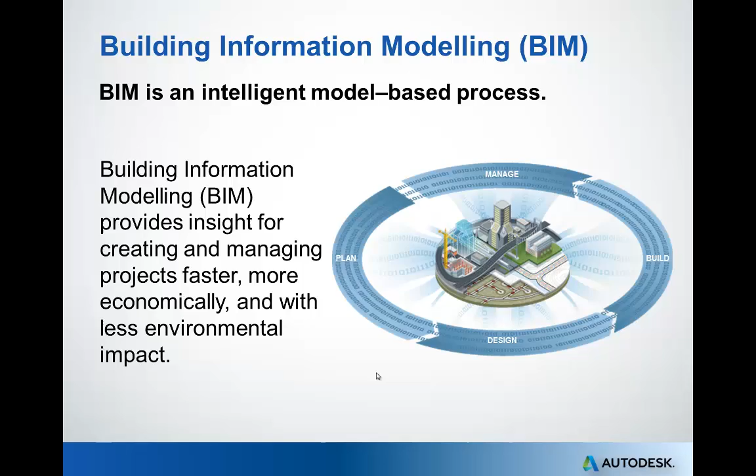If we look at architects, they've consistently been the heaviest BIM users, due to the length of time they've been involved with building information modeling. They're projected to reach an industry-topping level of 75% adoption by the end of 2014.

Engineers actually had the lowest level in 2011, at 26%. This is expected to almost double, going to 40% by the year 2014.

And it's interesting, the fastest rate of growth right now is with contractors. They're projected to reach over a 50% adoption level by the end of this year.

As Douglas and I have talked internally here at EDSI, this is consistent with what we're seeing in our region. Higher education and universities have been the largest driver, with Virginia Tech, UVA, Liberty, VMI, and Radford University all having multiple projects requiring BIM deliverables.

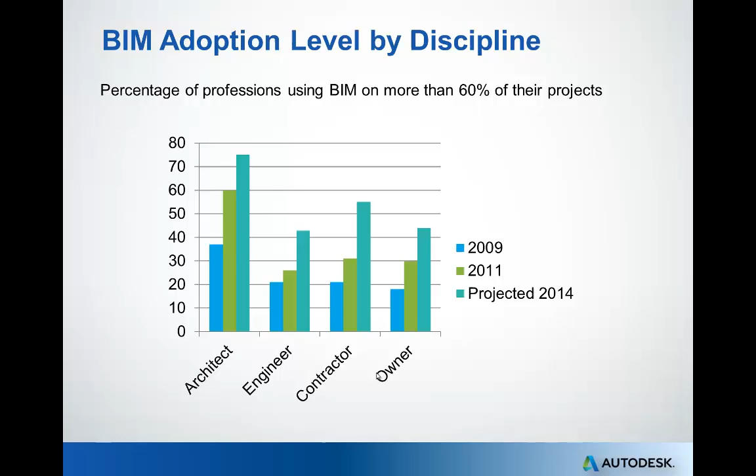Every organization is different. We all have different projects, different processes, and different skill sets within our organizations. We feel that the key to any investment you make is ultimately to achieve a return on your investment, or an ROI.

As we talk about return on investment, it's important to realize that the business value of BIM is driven both by internal and external forces, and at multiple levels.

Let's consider the areas where one might find the value of BIM from multiple perspectives. At the very center, the value of BIM can be realized at the project level. This is where, by its basic nature, BIM drives improved design quality, reduces project delivery cost, and can also reduce the timelines associated with RFIs and change orders.

This is where the use of BIM can have an impact to make a project finish under budget and ahead of schedule. The project-level benefits of BIM are amplified as we look at the overall value to a firm that's implemented BIM.

Firms can see the value of BIM in increased profits resulting from multiple factors. These include the ability to offer an expanded range of services that can help you reach new market segments. The use of BIM can also help firms maintain repeat business with existing clients. And the predictability that working in BIM affords a firm can also result in fewer legal claims associated with litigation fees.

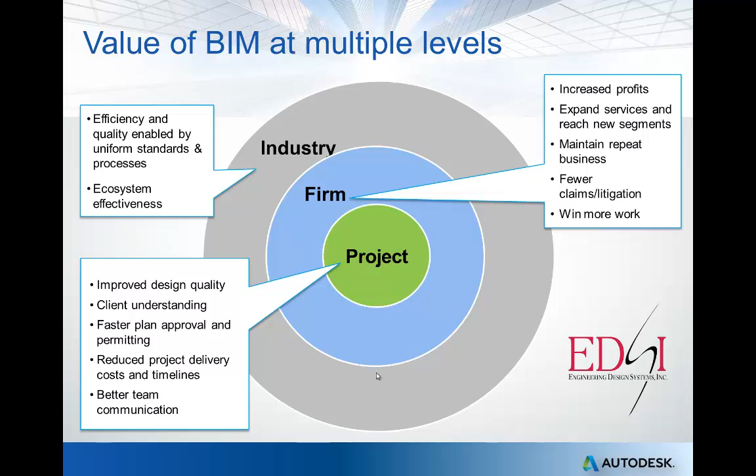Last but not least, we're seeing the value of BIM from an industry perspective. Overall, we gain efficiency in sharing and coordinating more information through an intelligent model.

Now, we've talked about the benefits, but the transition to BIM is not without cost. Firms need to make investments in software, subscriptions, investments in their people, and in their computer systems. It's also important to look at implementation costs, training costs, and costs of developing a template. Last but not least, BIM requires a process change within your organization, so we need to start rethinking team roles and looking at new, more efficient communication models.

With all this being said, the benefits and the payback can be significant. The firms that have successfully implemented BIM have increased productivity, increased collaboration, fewer change orders, more accurate estimating, and overall better designs.

Now, we found at EDSI the key to getting a real return on your investment is a good, solid implementation within your organization. We just like to say this is not your typical software upgrade. To be successful with this technology, you're going to need a comprehensive plan and a high-level approach.

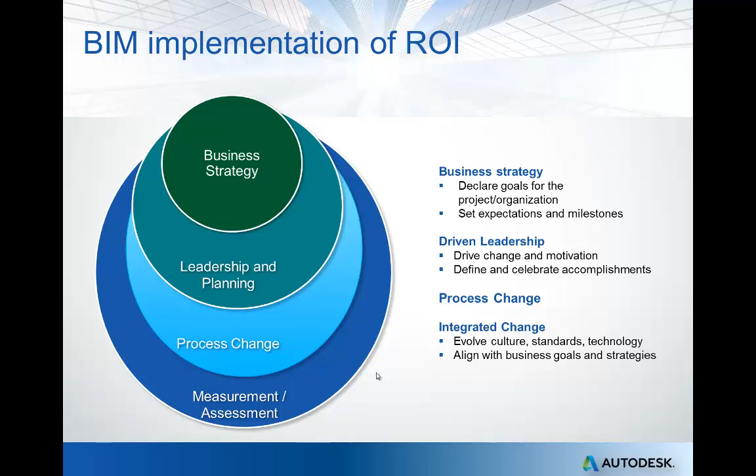The bottom line, I think, is our organizations have built our processes and workflows around our legacy software tools and technologies. With Revit and BIM, it's really necessary to look at how we work and how we share information to ensure we get the most from this powerful technology.

Now, Revit is Autodesk's solution for BIM. It was purpose-built for building information modeling. And with that, I'd like to introduce you to Douglas Bray. Douglas is an AEC and BIM specialist here in Engineering Design Systems. He has assisted numerous firms with extremely successful BIM implementations.

As I introduce Douglas, I'd just like to say that Revit is a better tool for design and documentation. Douglas is going to give us a brief demonstration on 3 topics where this application really excels.

First and foremost is the automation of processes. Douglas is going to demonstrate how Revit handles so much of the tedious drafting and documentation automatically. Second, he's going to show the power of drawing coordination with the Revit platform. Coordination and sharing of data has always been a challenge in our industry, and Revit provides a great platform to better coordinate disciplines. Last but not least, this is a tremendous tool to help you visualize and sell your designs.

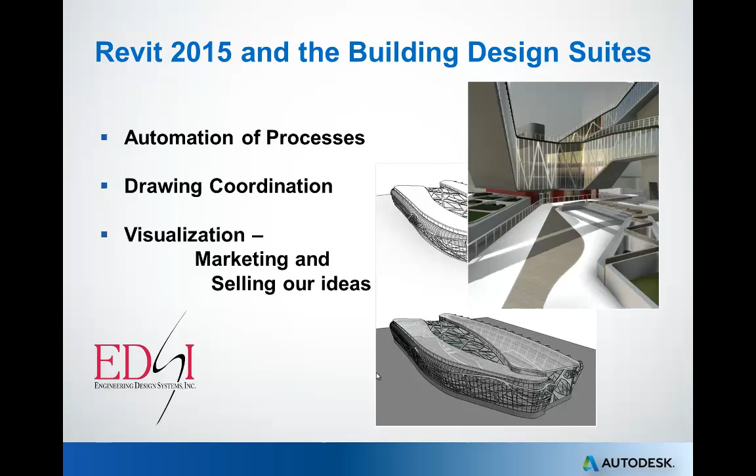Today we're going to look at Autodesk Revit 2014. The three areas I want to focus on are the automated process, the coordination, and the visualization.

Most projects, when you as an architect get started, you may have some type of a layout from the coordination that you have with the owner on what you would like to do. You have your exterior shell, and then you have the interior. In this example, I want to focus on the design options aspect of Revit 2014. Here we just have a basic layout where we have an open office, office A, B, and a restroom for the men and women and a mechanical room.

As architects, you like to present the owner with different layouts, or even for yourself. So within design options, we have the main exterior area, which will be for the main model. If I click here on this view, we can have option 2. Now within this option, I'm going to make this option editable. Notice that the main model grays out.

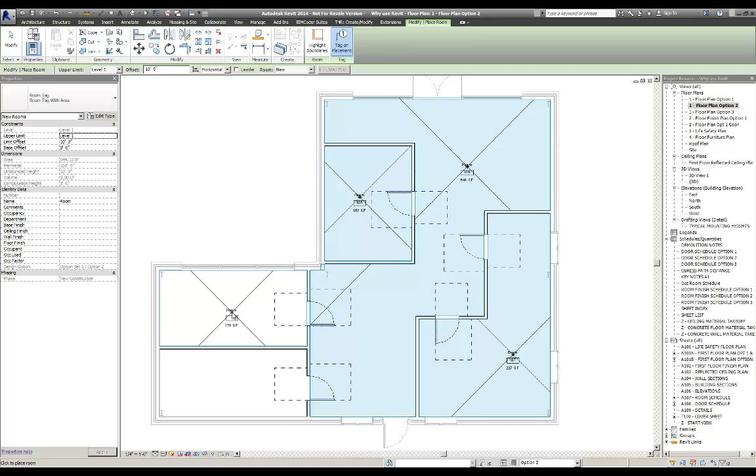This is just for a general layout to illustrate how this is going to be. So let's go ahead and add in our rooms for these areas as well, here, here, and here. This is going to be our layout that we're going to present for ourselves as well as for the owner. It's sort of like the tissue paper that architects use when it comes to different layouts. So we can go to layout 3.

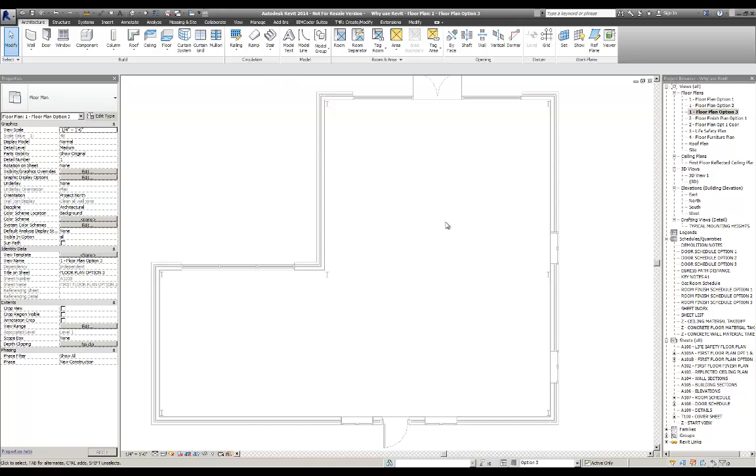Floor plan option 3. We're going to make that one editable, and we can do another one. So maybe we do something a lot more simpler, something like that. Come straight down here, and we'll come straight over here.

Let's add in our doors, interior, and you can have ADA doors here with the clearance on them. Okay, and now let's add our rooms in here.

As we look back here, we'll go ahead and put this back to main model. We have option 1, which we're showing this particular layout. We have option 2, and we have option 3.

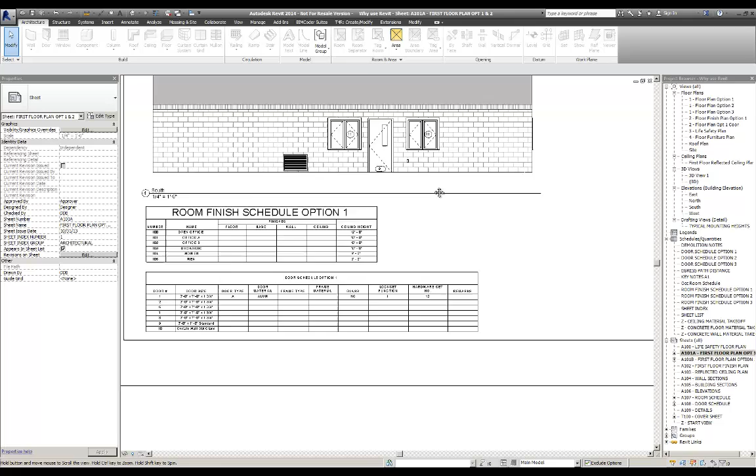Now what's really nice about this, if we look at our floor plan here, our sheet, each option as indicated here in the floor plan, of course we have some elevations of the exterior, but we can have our schedules that will represent each of those options. As you see here, room finish schedule option 1, and it shows all of our rooms that we've indicated for that particular option, as well as a door schedule.

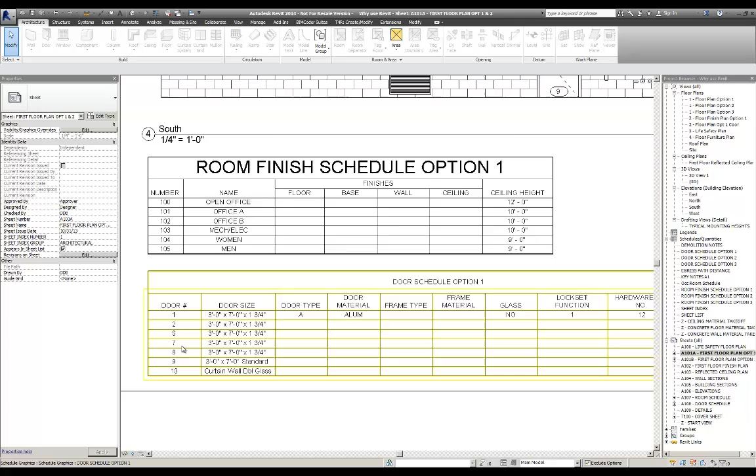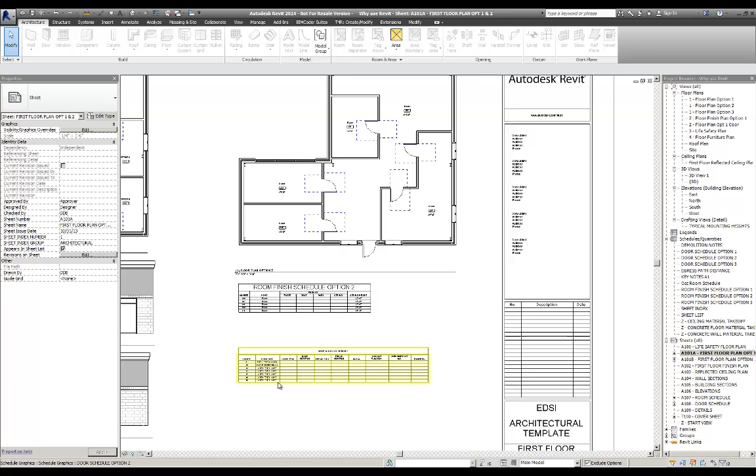If we go over here to option 2, we see that we didn't identify what these rooms are, but you can clearly see that it's identifying all of the rooms that were added for that option and that option only, as well as the doors that we added for that one as well. Okay, I think that's very, very powerful.

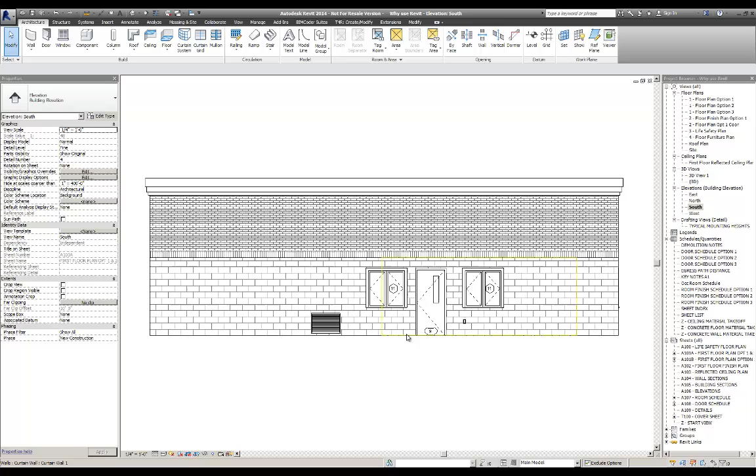Let's keep going. As we see here, we notice that within Revit, when you have a model, let's go back to our option 1. This is the main model. And the south elevation view is looking at it from the rear. So there's our rear door, and there's a window here and a window here.

Okay, so go back to this option. Let me close all the windows and open the south elevation view back open again. I'm going to tile it. So now we're capable of seeing the floor plan itself as well as the elevation of it.

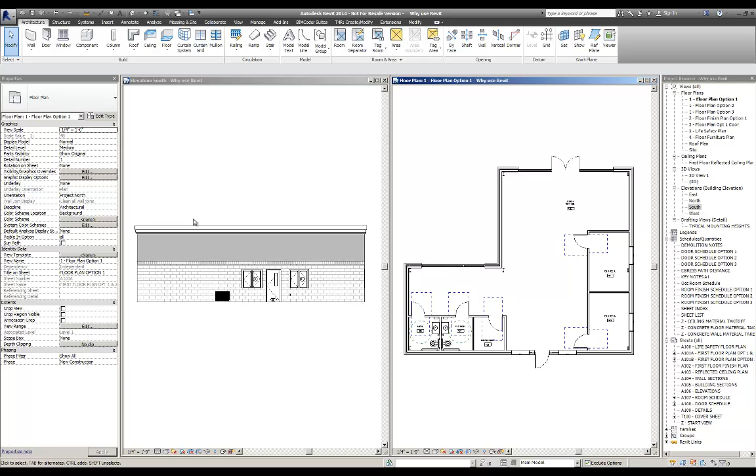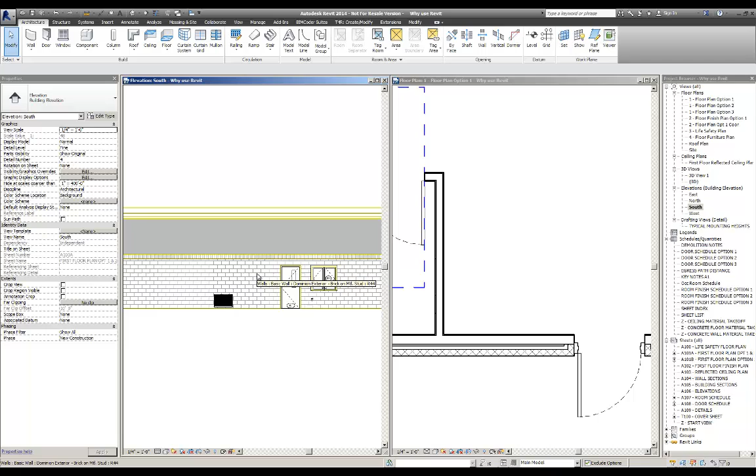Well, let's say that there is a change that needs to be made. So if this window here will need to be deleted, notice that not only did it remove it from off of the floor plan, but it also removed it from the elevation. So that's one less step you have to be concerned with when it comes to the coordination of whether the elevations are going to update with the changes that I make.

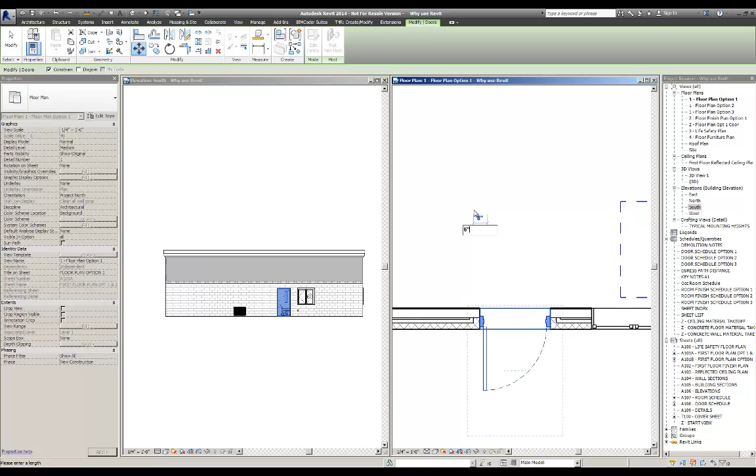Again, another example would be, let's say this door moves. Let's say we just move this door over 6 inches. And if you also notice here that the elevation, it moved over 6 inches as well. Even a door swing, if you take this door and we switch the swing on it, the elevation also updates as well. Very, very powerful. Let's keep going.

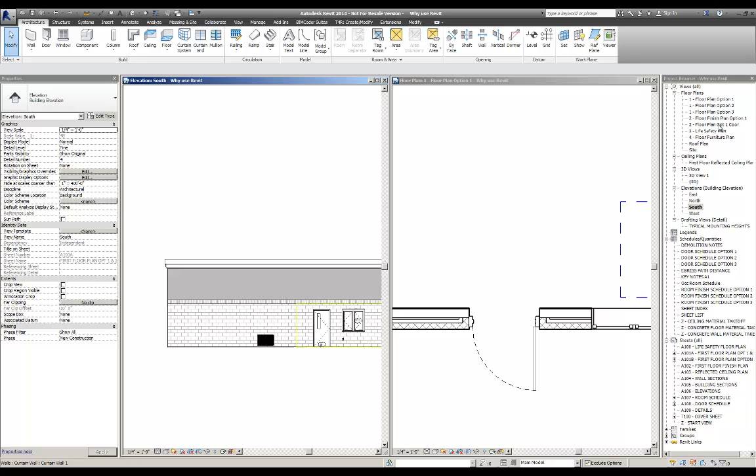So as we see here, we have some other views that we can look at. Right here we have a furniture layout plan. With the furniture layout plan, we can lay out our different furnitures. In our option 1 plan, we can also create it for option 2 and 3.

But what I really want to show you is the floor finish plan. If you have a view and you want to indicate what floor finishes will be presented, this is how we can do that. Again, we're talking about the automated process, so we quickly want to be able to show what floor finishes are going to be available. So let's make option 1 available.

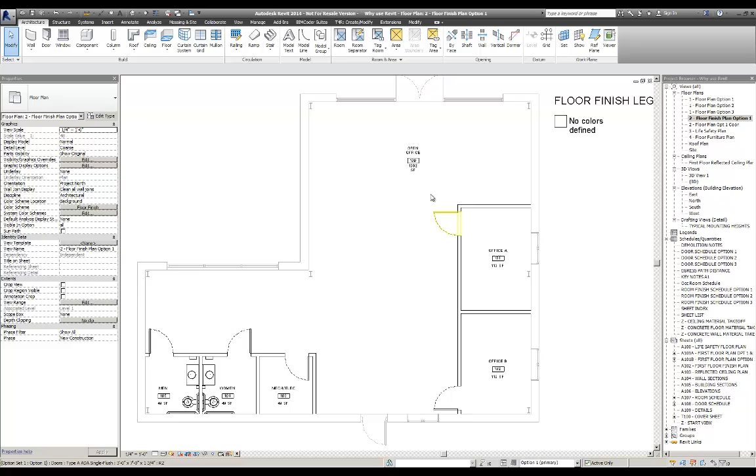We go here to this open office. Let's say we want the floor finish to be wood. We can come down here and pick wood. Not only will it show a pattern, but within our legend it shows us that within a box in here.

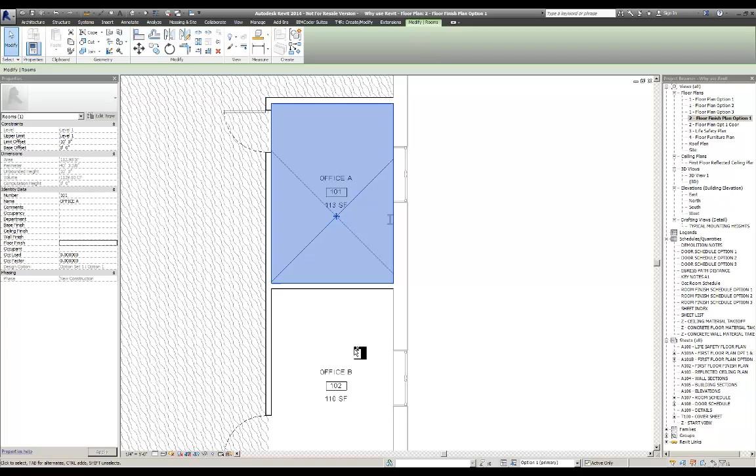Let's keep going. Let's say for this office as well as this one over here, we want the floor finish to be carpet. It adds that to the legend. And let's go over here. Let's say the women's and the men's bathroom, we want that to be VCT.

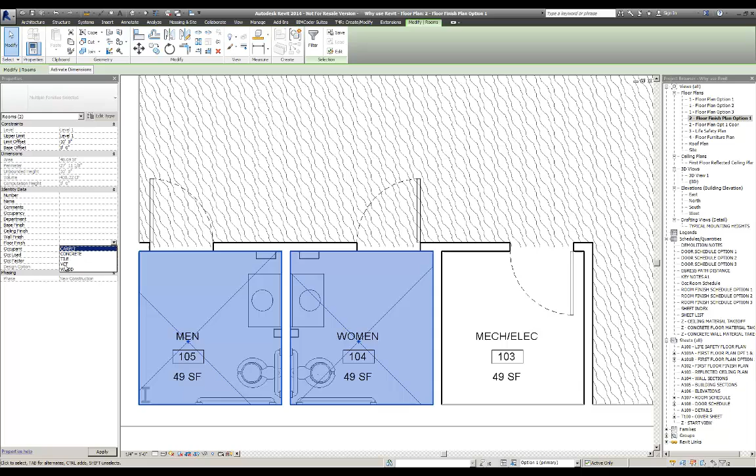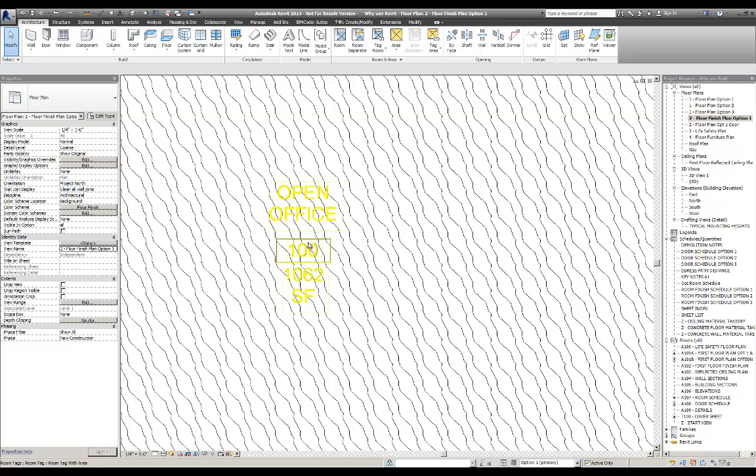And last but not least, we'll say that the mechanical room will be concrete. Now that's pretty fast. We're identifying the floor finishes, and as we see here, we have a square foot area with our tags that allows us to use this number to do budgetary calculations on how much it would cost for wood or carpet to be placed here. There's so much more we can do with this.

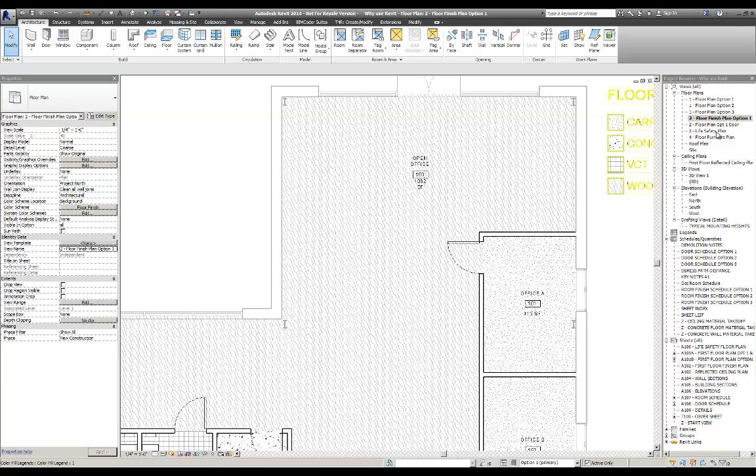Okay, let's look at our life safety plan. So we go to that view, and there we have a life safety plan. I know architects like to generate an occupant load. They want to know what the occupant load is for these office areas. So how can you do that?

Well, within the software you can generate a schedule that will pull in the name, the number, and the area. And we can put in an occupant factor. For an office area, depending on the local code requirements, I think this is going to be 100 for the office area, and that may vary from state to state.

So as we see here, there's a calculated formula going on where we're taking the area and dividing it by this factor. So for the open office area, the calculated occupant load is 11. And for those small offices, the code occupant load is 1. So we can put these numbers in to match up over here.

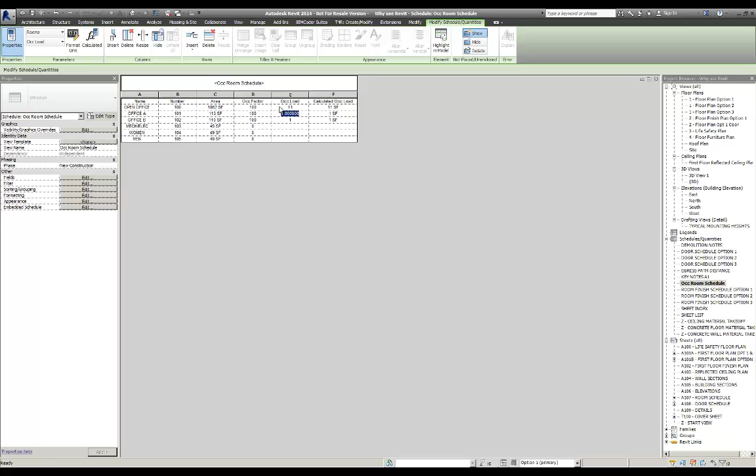And now we can go back to our floor plan and we see that our tag updates and shows us all the pertinent information that we need from that aspect.

What about a fire egress path? We have that capability as well. So we come over here to families. I believe I have that under special equipment. There we go. Okay, just want to put that in there, and then we're going to do create similar.

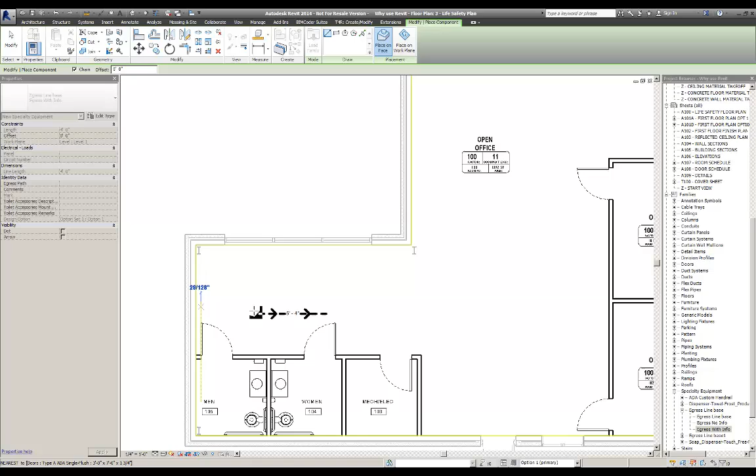And let's say we start. I'm going to start right here. Start an occupied space, we'll click here. I'm going to head on out here. Then I'm going to add one here and go straight on up. Take this one, we're going to delete it. Click right here, we're going to add us a dot to it. On this one, we're going to add an arrow. And on this one, we're going to add an arrow.

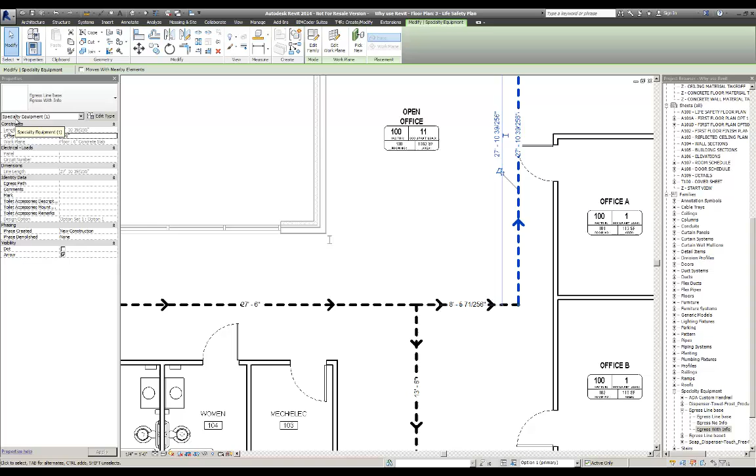Okay, let's do a little cleanup work here. Alright, and as you see here, this particular tool that I'm showing you, this is the specialty equipment category that I call it, but this is like an egress line-based path where we're showing the distance on it. So you know what's the distance needed from here to get out and all the way out this way as well. I think that is pretty powerful.

Let's keep going. What about from a coordination aspect? Okay, so once this floor plan has been approved, we can take this and hide that category. Once the floor plan has been approved, we want to submit this to our mechanical, electrical subs, so they will have time to lay out the mechanical, the electrical, and the plumbing.

Let's say we have done that, and now we're ready to review the type of work that they have done so far. Well, you can do that, and it would be very powerful if everyone is using the same platform. So this example is that your subs are using Revit 2014 as well. And as we see here from the project browser area, Revit link, I have an MEP .rvt file already linked in. So let's go to a view that is showing the coordination side.

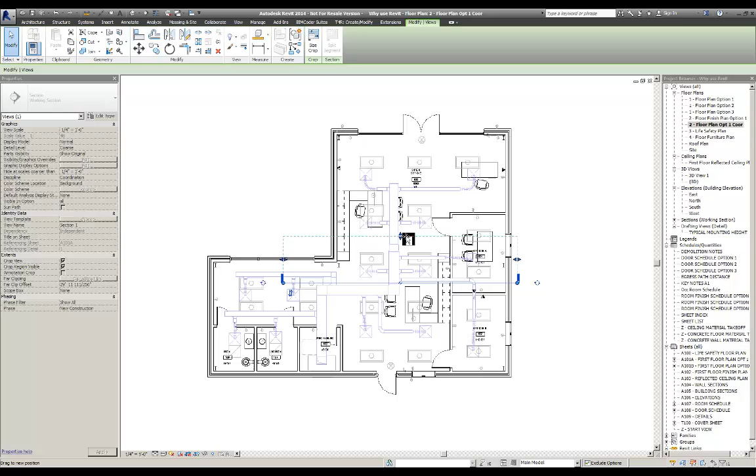So we can go up here, click section. We'll come across here. We just want to look in this general area right here. We know we got a beam here and one here, and I know there's a cross member here. So let's take a look and go to that view.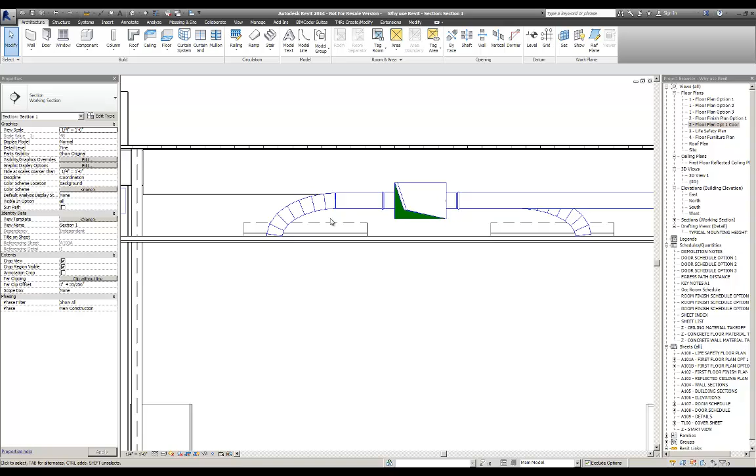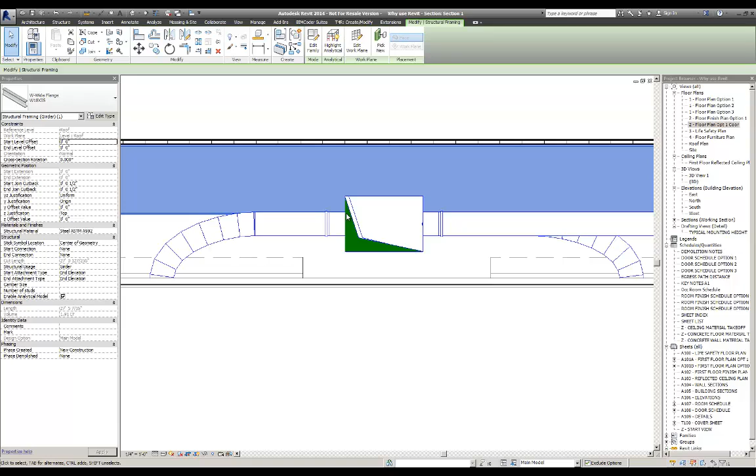As we see here, we're looking down this section. We can clearly see, wow, look how much information is given to us. We see the exterior walls, the furniture, the lights, the ceiling space, and we also see our beam here, and some ductwork as well. So something's going on where there's a conflict with the ductwork in this beam.

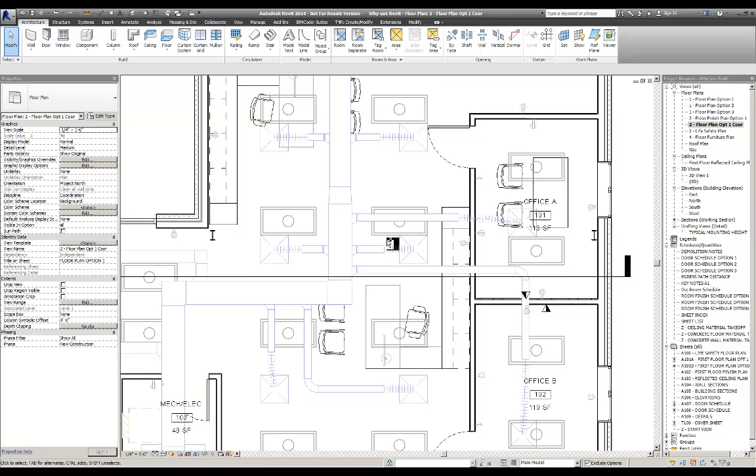Let's look at another aspect. Again, this is the power of Revit when it comes to visualization. So if we click on the roof, we're just going to temporarily hide that. We can zoom in here and visually see that when the ductwork was run, because of the ceiling being so high, they had to have the ductwork, and presently it's running into this beam.

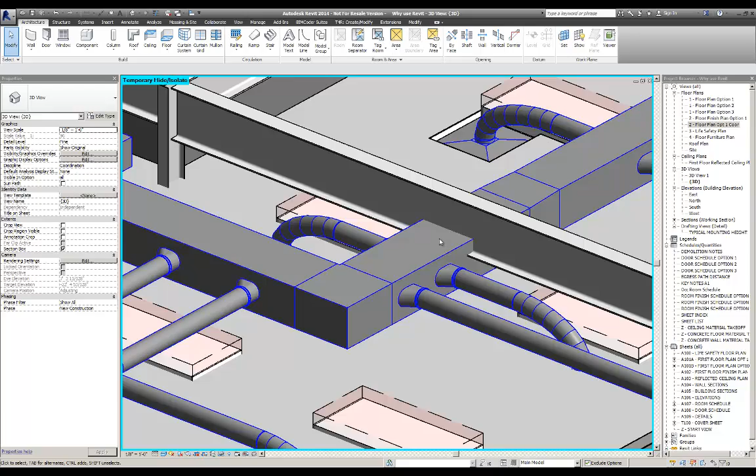Now there's several things that can be done. They could possibly change the size of the duct, make it squattier and make the height not so high, or they can do a turn down if need be. But the point here is we can visually see the way they're running the ductwork. It is too high and it's going to cause a conflict out in the field.

So to find these issues early is extremely important, and this is the time-saving aspect of it. We can clearly see the problems that we're going to find out in the field and correct them before we get change orders. Okay?

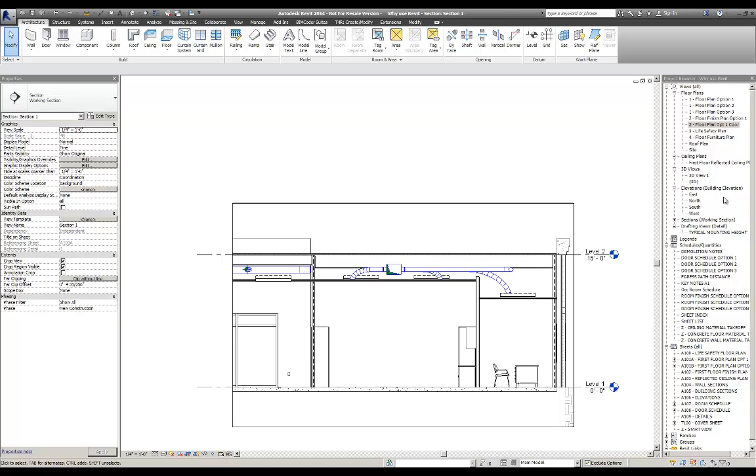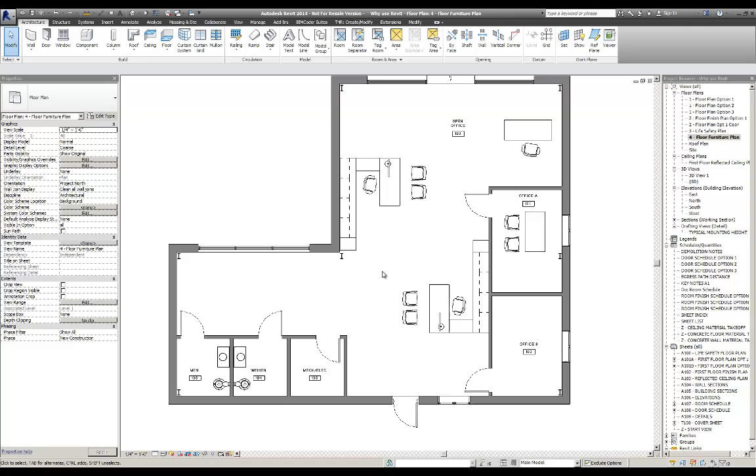Let's look at another visual aspect of it. So let's say this is the layout that we wanted, and from a furniture floor plan layout, this is something that we would like to utilize. Okay? And let's say you wanted to create a view, a camera view of this area.

So here we can look at this camera view and look back as you're exiting the building, and we can clearly see how this area is going to look, and if we need to add furring around these beams so they don't show up, we can see if we don't do that how this is going to look. Of course, as an architect that would be taken care of, but it's very quick how we can...

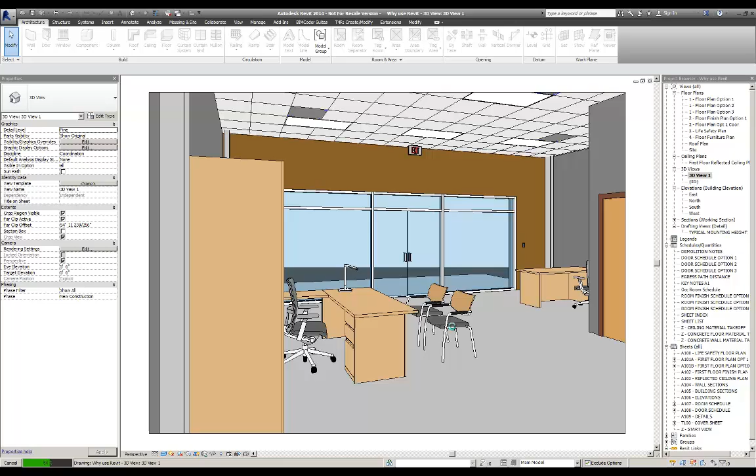Create these different views, and we can change the display aspect of it. So here I just changed it so that it's going to show realistic. So now we have stone over here on the wall that I've painted on. If we wanted to have hardwood floors here, we hit modify. We can do paint, and I can do wood.

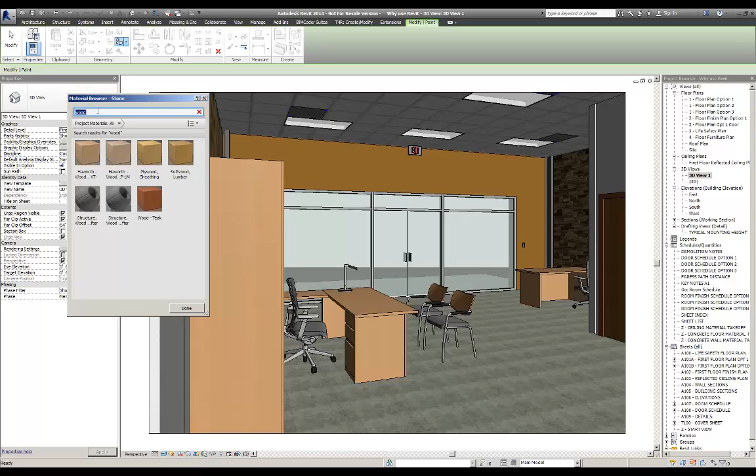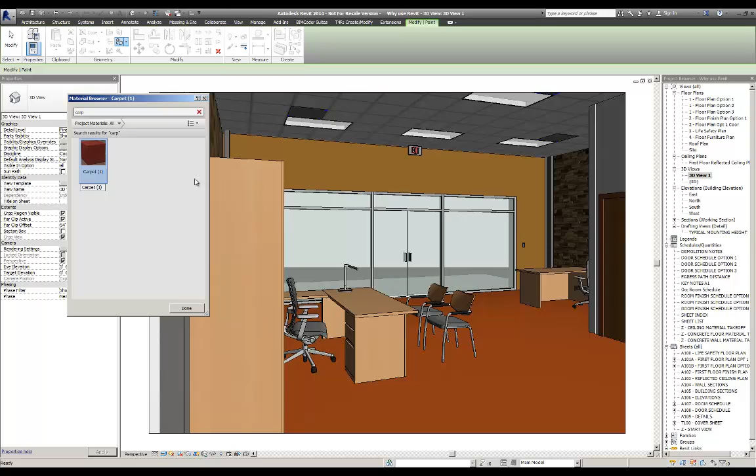We can do, let's do another search. There goes oak flooring, and I can paint that oak flooring in to get a good feel on what that would look like if this was that as well, or if I wanted to do carpet, I can change that to carpet.

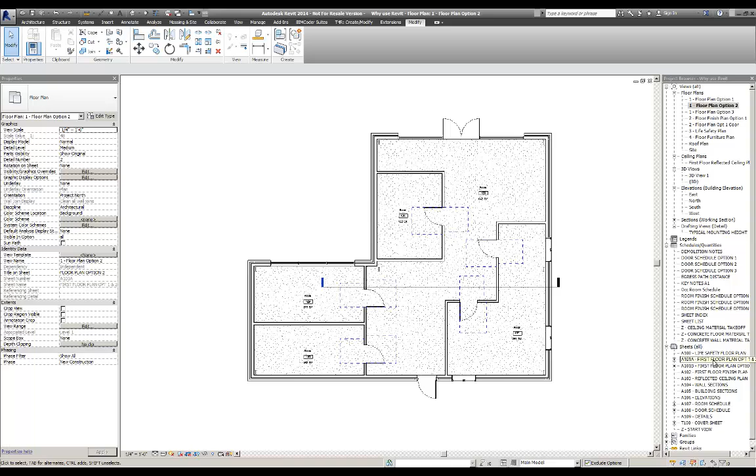Okay? So as a recap, it's very quick to do different options. So I can have this layout as well as others. We can very quickly generate different floor plan views and also have the schedules update.